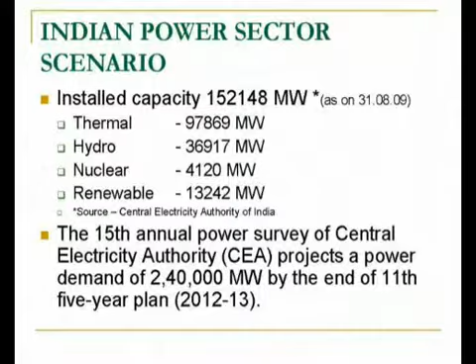On this plate you can see the breakup of that capacity, how this energy is coming, like thermal, hydro, nuclear and renewable. These are the four major sources of power in our country. You can see from this plate that thermal energy constitutes a major chunk of the total installed capacity, followed by hydro, renewable and then nuclear. Nuclear is still in a nascent stage. The projection of power requirement in our country is around 2,40,000 megawatt. So there is a huge difference between the availability and the requirement.

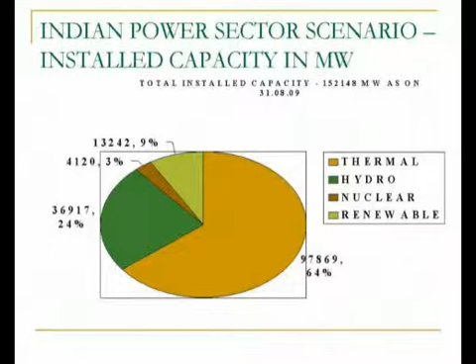This pie chart shows the visual description of the various power sources like thermal, hydro, nuclear, renewable. From this pie chart it will be more clear that thermal is a major portion contributing to the total installed capacity. The world over, the same trend can be seen, because the major source of energy is coal, that is thermal power, followed by hydro and nuclear.

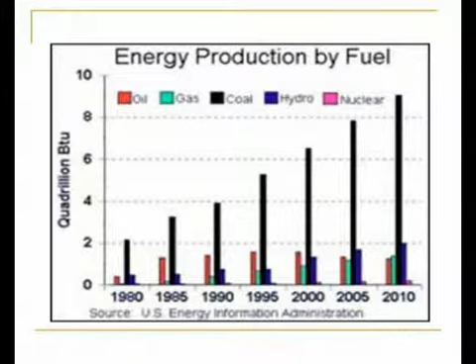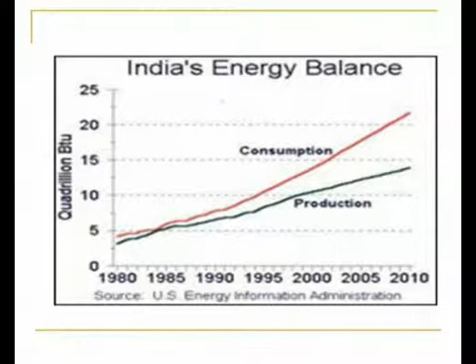This chart shows the graphical representation of the consumption and production of power in India. As you can see, the gap between consumption and production is increasing day by day. Now we will see what are the sources of energy. There are two sources of energy, renewable and non-renewable. As the name suggests, non-renewable sources of energy are exhaustible in nature. Once they are used, they cannot be regenerated.

The most common examples of non-renewable energy sources are petroleum, natural gas, coal, and nuclear. Of these, petroleum and coal are the major sources as far as conventional non-renewable energy sources are concerned. There are certain unconventional non-renewable energy sources also, that is oil shale and natural gas hydrates. But mostly petroleum, natural gas and coal are used the world over.

Now we will see renewable energy sources. As the name suggests, these can be regenerated, renewed, and they are virtually inexhaustible. The types of renewable energy sources are solar, which again constitutes solar photovoltaic and solar thermal power; then wind energy, hydropower energy, biomass energy, ocean energy, geothermal energy, and waste to energy, meaning the waste generated can be used to generate energy.

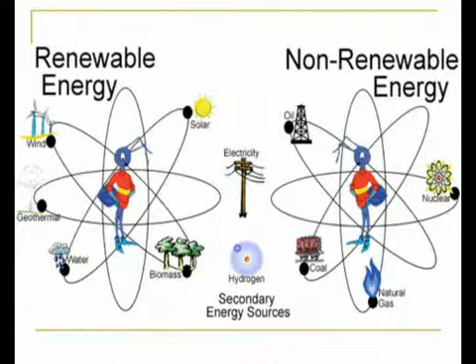This plate shows various sources of renewable energy and non-renewable energy. As you can see, there are two distinct entities, and our renewable energy is having wind, solar, geothermal, water, biomass.

Now, why do we need alternative energy? As I was discussing, the demand for energy is increasing day by day, and our sources are limited. As we consume petroleum, a day will come when we will be exhausting all the sources. So it is very necessary to search for alternatives right from this stage, because fossil fuel reserves are very limited. Population is also increasing. India's population is increasing, and with the population increase, requirement of energy is also increasing. So we have to meet that additional energy demand also. For that, we need to search for viable alternative solutions for energy requirement.

India imports around 110 million tons crude annually. So a major chunk is being spent as foreign exchange towards meeting energy requirements. Moreover, 52% of households, so many villages, are unelectrified. So we have to search for alternatives so that the maximum number of villages can be electrified in a viable manner.

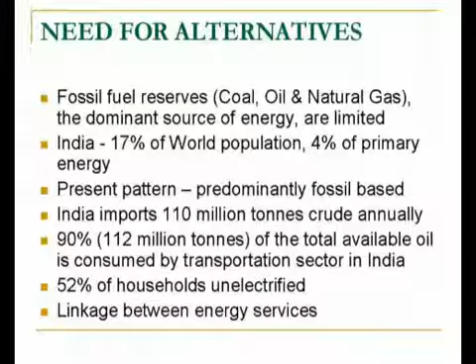We shall now come to the characteristics of renewable energy sources. The most important characteristic of renewable energy sources is that they are virtually inexhaustible. There is a continuous supply which we can realize. It has got a large inexhaustible source. For example, solar energy is intercepted by Earth at the rate of 1.8 × 10^11 megawatt. Another benefit is it is a clean source of energy, that it is very environmentally friendly.

Then large collection areas, but at the same time, these renewable energies also have high capital costs, and the major disadvantage is that availability varies with time. For example, wind power. Wind may not be available at all times, so it is highly cyclical in nature. Then there is a need for additional storage because, for example, if we are generating power by wind, then we need to store that power also, or evacuate that power and transmit it over long distances to load centers. So these are the characteristics of renewable energy sources.

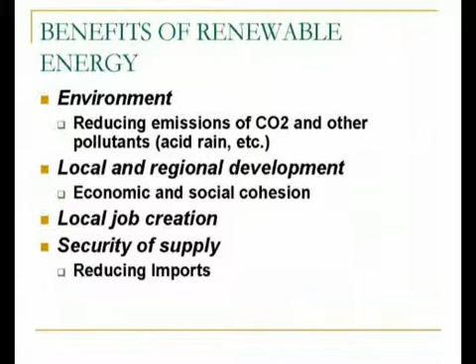Now, what are the benefits of renewable energy sources? The major benefit is that they are environmentally friendly. By using renewable energy sources, we will be reducing emissions of carbon dioxide and other pollutants. Then it leads to local and regional development because in rural areas particularly, it is not economically viable to supply grid electricity. So for that purpose, we need to have renewable energy there. It will also lead to local and regional development and economic and social development of that area. It also helps in creating jobs locally. Then a major advantage is that it leads to security of energy for a nation.

Then cogeneration or trigeneration. What do we mean by cogeneration? Cogeneration means that we are using an industrial process to raise steam which can be used for process industry as well as to generate power. And the fourth is demand side management. That is, by managing the loads, we are using less energy and that way we are helping in generation.

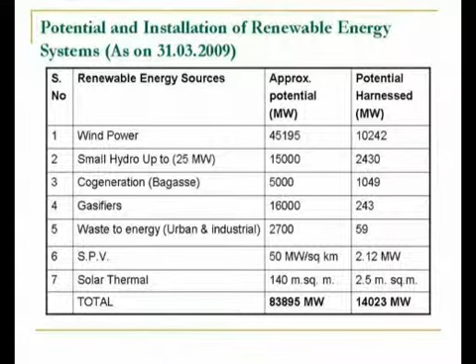Then these are the various sources. The total potential from renewable energy sources in India is pegged at around 83,000 megawatt, of which we have commissioned only 14,000 megawatt as of now. It means there is still a huge potential to realize in these renewable energy systems. By realizing this potential, we can meet almost 25% of our total installed capacity.

Now we will discuss various sources of renewable energy one by one. First we will start with wind energy because that is the area where maximum potential exists. India has done very good work in the field of wind energy and it ranks 5th in the world after Germany, USA, Denmark and UK. The wind energy potential in India has been estimated at 45,000 megawatt, of which 10,000 megawatt has been installed.

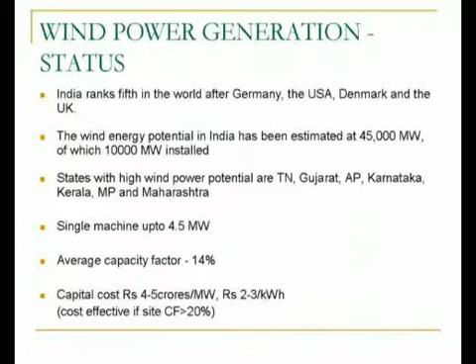Certain states in India have very high wind power potential, like Tamil Nadu, Gujarat, Andhra Pradesh, Karnataka. Nowadays, rapid strides have been made in the technology of wind turbines also, and a single machine of up to 4.5 megawatt capacity is now available. And the average capacity factor of these wind turbines is around 14%.

So, what is wind energy? Its basic principle of operation is very simple. The kinetic energy of wind is converted into mechanical energy, which in turn is used to generate power. Wind turbines are being used since times immemorial. Even in olden days, prehistorically, these wind turbines were used to raise underground water. So this is not a new concept. This is a very old concept.

Only thing is that certain technological changes have made it more economically viable, and it can be used on a large scale also. Nowadays wind turbines are mounted on a tower to capture the most energy, because as the altitude increases, the wind speed also increases. So it would be advisable to put it on a certain height. Say 30 meters is the usual height at which commercial wind towers are installed.

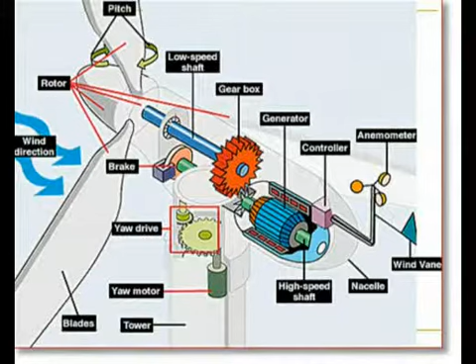This chart is a cross-sectional view of a wind turbine showing various parts. You can see from this chart that the major component of a wind turbine is the rotor. The rotor has got 2 or 3 blades. Then the shaft of the rotor is connected to a gearbox. That gearbox is in turn connected to the generator, so when the blade turns, it moves the generator also, and it generates power. Other things like controller and yaw drive, etc. are also included to control the speed of the wind turbine.

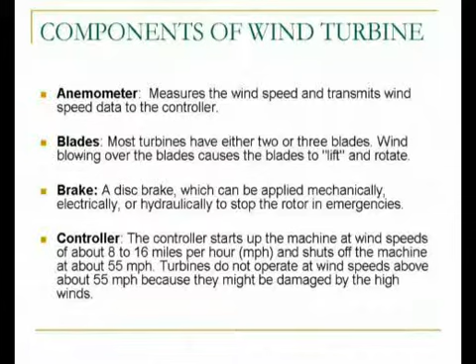So we were talking about the components of the wind turbine, and there are various components like the anemometer. It basically measures the wind speed and transmits wind speed data to the controller. Then blades. Most turbines have either 2 or 3 blades. Wind blowing over the blades causes the blades to lift and rotate. Brake: a disc brake which can be applied mechanically, electrically, or hydraulically to stop the rotor in emergencies. Then there is the controller. This controller starts up the machine at wind speeds of about 8 to 16 miles per hour and shuts off the machine at high speeds to prevent damage to the rotor.

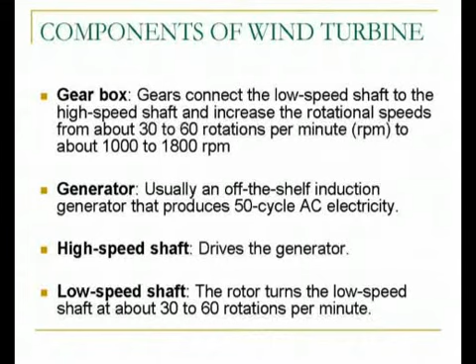Gearbox. Basically, when the wind blows, it drives the rotor, which moves at a very slow speed. That speed is converted to a high speed through this gearbox. Then the generator is usually an induction generator that produces 50 hertz frequency AC electricity, and there is a high speed shaft which drives the generator. These are the various components of a wind turbine. The towers are made from tubular steel, concrete or steel lattice. It can be of any material. Because wind speed increases with height, taller towers enable turbines to capture more energy and generate more electricity.

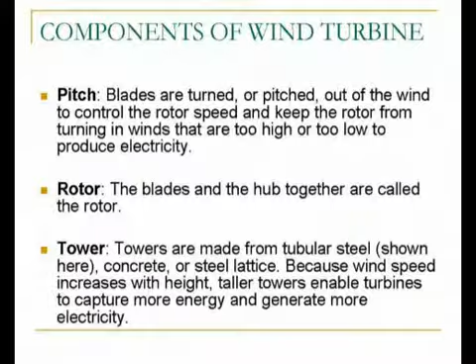What are the advantages of wind energy? It is a clean fuel source. No pollution is involved because you are only utilizing the natural wind which is available. It is inexhaustible; there is no dearth of wind.

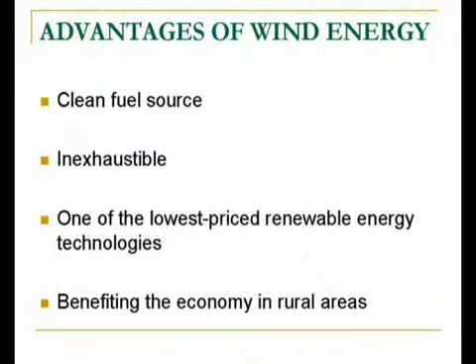Then it is one of the lowest price renewable energy technologies. Later on we'll compare the capital and running cost of all the sources of energy. In that chapter we will see in detail what the pricing is. But this wind energy is one of the lowest price renewable energy, and that is the reason it has been developed in India at a considerable rate, and it benefits the economy in rural areas.

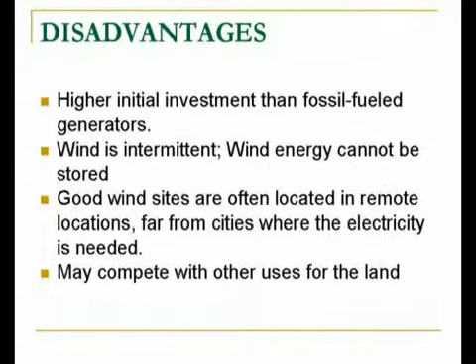Now, what are the disadvantages? Let us see the disadvantages also. As compared to fossil fuel generators and conventional power plants, it has got a higher initial investment. A major disadvantage is that wind is intermittent and it is very unpredictable. So, wind energy cannot be stored.

It cannot be stored. And good wind sites are often located in remote locations far from cities where the electricity is needed. So a lot of cost is involved in evacuating that power generated from the wind generator and transmitting it over long distances to the load centers.

Another disadvantage is that it may compete with other uses for the land, because the requirement of land is huge for establishing wind power plants. So it may compete with other uses for land, for example farmlands or other uses also.

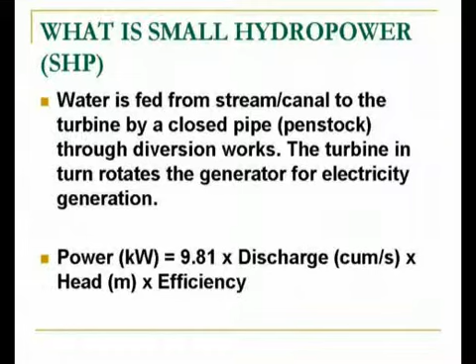Usually, the water is fed from a stream or canal to the turbine by a closed pipe. This closed pipe, which we saw in the photograph, is called penstock. This is the technical name for it, penstock. So, the source of water is usually an existing river stream, from where the water is brought in this penstock. This water then rotates the turbine at high velocity for electricity generation.

There is a formula for how much power can be generated from a small hydropower plant. Power in kilowatts generated is equal to 9.81 into discharge, that is the flow of water, how much water is flowing, into head, from what height this water is coming, into the efficiency of the turbine. This formula gives the power generated.

Advantages of small hydropower. This small hydropower has got non-consumptive use of water. It means that actually we are not utilizing this water, we are just using the kinetic energy of this water to generate power. It also does not require a very large capital investment, and it has got a very short gestation period ranging from 6 to 24 months. So in a matter of around 2 years it can be commissioned.

It has low operation cost also, and not much technical knowledge is required. Unmanned power stations are also possible in this case. It can be connected with the electricity grid, and it can act as a catalyst in promoting socio-economic changes in remote areas. It is definitely more eco-friendly as compared to conventional hydropower, because a lot of environmental concerns are being raised for conventional hydropower. So these small hydropowers are a very good substitute to conventional hydropower.

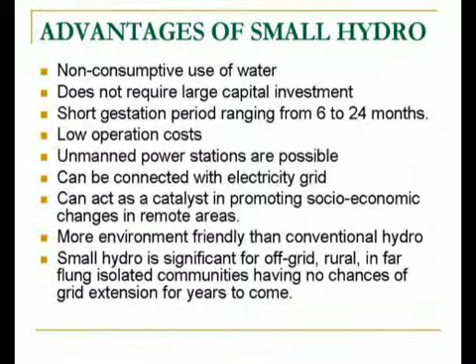And small hydropower is significant for off-grid, rural, and particularly mountain and hill areas, where a lot of scope exists for small hydropower. Now we'll see how these small hydropower plants are classified. Classification based on capacity. Various countries adopt various systems for classifying these small hydropower plants, but in India we have classified it into three parts. One class is micro, when the station capacity is up to 100 kilowatt. SHP whose capacity is up to 100 kilowatt is known as micro small hydropower.

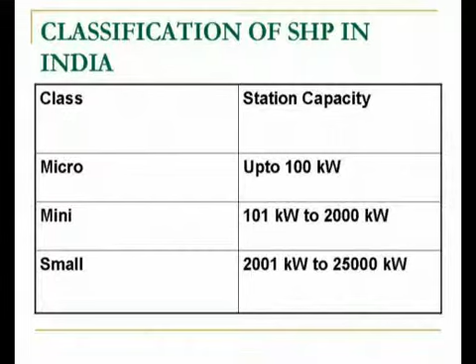Then comes mini. This capacity ranges from 101 kilowatt to 2000 kilowatt, that is 2 megawatt. 1 megawatt is equal to 1000 kilowatt. And next comes small hydropower. Its capacity ranges from 2 megawatt to 25 megawatt. Above 25 megawatt, all the power projects in the sector are classified under hydropower.

Types of schemes, how these small hydropower projects are constructed. There are three systems actually in this. One is run-of-river based. In run-of-river, the flow of water is utilized to generate the power. So no storage is involved, and the output is of course subject to the instantaneous flow of the river. So if the flow is less, then the power generated will be less. And reliability of discharge is very much necessary to be established, because if there is no reliability, then the plant factor will go down.

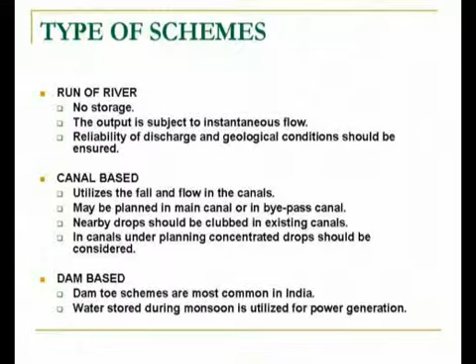Second classification is canal based. It utilizes the fall and flow in the canals. When we are constructing canals for irrigation purpose, it follows the natural topography of the area, and when there is a natural gradient in the canals, this gradient is utilized to generate power. It can be planned also while constructing the main canal or in a bypass canal. So the drops in the natural gradient of the canal are used for generating power.

Then the third scheme comprises dam-based small hydropower, in which dam toe schemes are most common in India. Here water stored during monsoon is utilized for power generation.

Cost aspects of small hydropower. The parameters affecting costs are: the physical sizes of civil works and electromechanical equipment, the construction aspects, and operating costs. These are the three components of project cost. The unit cost of hydro schemes is inversely proportional to the head. That is, higher the head, lesser the cost. And per kilowatt cost may range from 40,000 rupees to 90,000 rupees depending upon the layout, and it is very location specific.

If we compare small hydro with other renewables, it is the highest density renewable energy source against widely spread and thinly distributed solar energy, biomass, wind resource, etc. And its cost of generation is also cheapest among renewables. The efficiency of small hydro plants is highest among renewables as compared to wind energy or solar energy. The efficiencies are comparatively higher.

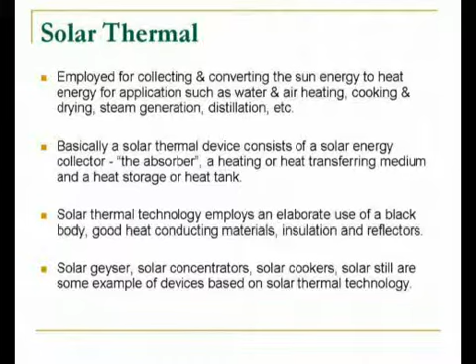Solar thermal technology employs an elaborate use of a black body, because a black body absorbs heat and is a good heat conducting material, along with insulation and reflectors. Solar geyser, solar concentrator, solar cookers, and solar still are some of the examples of devices based on this solar thermal technology.

Solar photovoltaic. Solar photovoltaic technology is employed for directly converting solar energy to electrical energy by using a solar silicon cell. It is commonly known as SPV, solar photovoltaic. Solar photovoltaic has found wide application in rural areas for various important activities besides rural home lighting.

Remote villages deprived of grid power can be easily powered using solar photovoltaic technology, and it can thus revolutionize the concept of making power available in remote and far-flung rural areas. The economics of rural electrification can be attractive considering the high cost of power transmission and erratic power supply in rural areas.

How is electricity generated through solar energy? Now we will see that solar photovoltaic can be used to generate electricity from the sun. We are using a silicon solar cell, which is made of silicon. It plays an important role in the generation of electricity. A solar cell is nothing but a PN junction, a positive and negative PN junction.

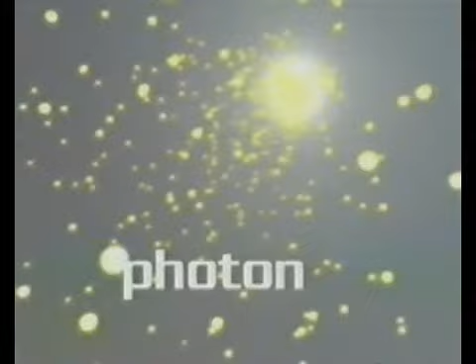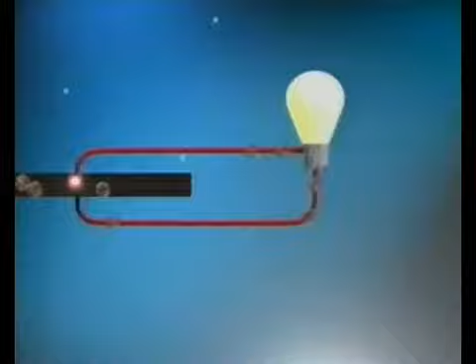Sunlight is made up of tiny packets of energy called photons. Every minute, enough of this energy reaches the Earth to meet the world's energy demand for a whole year. Photovoltaic panels consist of many solar cells. These are made of materials like silicon, one of the most common elements on Earth. The individual cell is designed with a positive and a negative layer to create an electric field, just like in a battery. As photons are absorbed in the cell, their energy causes electrons to become free. The electrons move toward the bottom of the cell and exit through the connecting wire. This flow of electrons is what we call electricity. By combining solar cells and photovoltaic panels, we can produce just the right amount of electricity to perform a specific job, no matter how large or small.

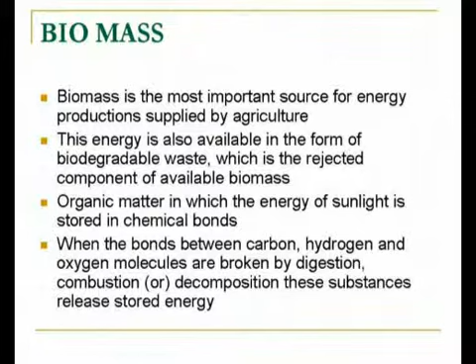Now we will come to biomass. Biomass power is the most relevant form of energy as far as rural areas are concerned, and it is the most important source of energy for production supplied by agriculture. This energy is also available in the form of biodegradable waste, which is the rejected component of available biomass. Organic matter in which the energy of sunlight is stored in chemical bonds. When the bonds between carbon, hydrogen and oxygen molecules are broken by digestion, combustion or decomposition, these substances release stored energy.

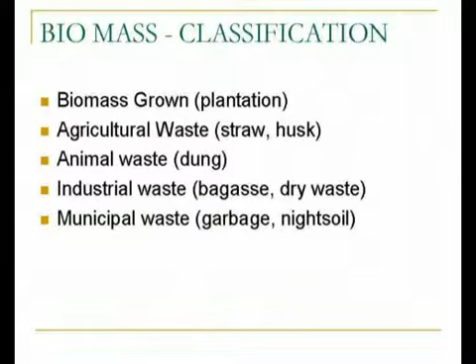There are again various classifications of biomass. One is biomass grown, that is plantation. The other is agricultural waste, waste from agriculture like straw, husks. Then there is animal waste, for example, cow dung. Then industrial waste like bagasse, dry waste. And the last is municipal waste, that is garbage and night soil.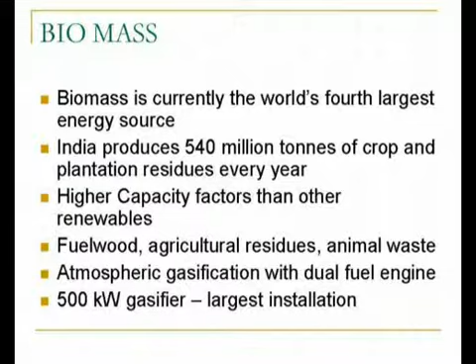Biomass is currently the world's fourth largest energy source. India produces around 540 million tons of crop and plantation residues every year. Higher capacity factor: these biomass plants have higher capacity factors than other renewables. And atmospheric gasification with dual fuel engine occurs. A 500 kilowatt gasifier is the largest installation in this field as on date.

Bagasse based cogeneration is another aspect of biomass power. What is bagasse? Bagasse is nothing but the residue left when the juice of sugarcane is extracted. So this byproduct of sugarcane extracted juice, that is bagasse, is used for generating power. First of all, this dried up mass is used in boilers to generate steam, and that steam is used in the process industry like the sugar industry, and the surplus steam is used for raising the power.

So it is a very important concept for a sugar producing country like India, and in a lot of states, the sugar industry has already commissioned these bagasse based cogeneration plants. Thereby they are meeting their own power requirements, and the surplus power is being fed to the central grid.

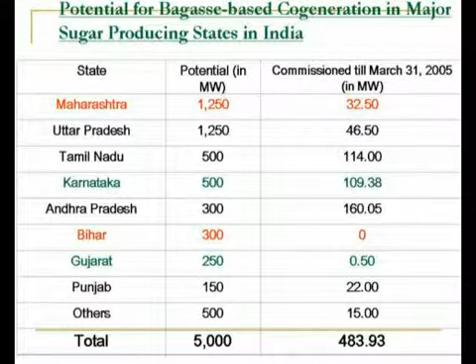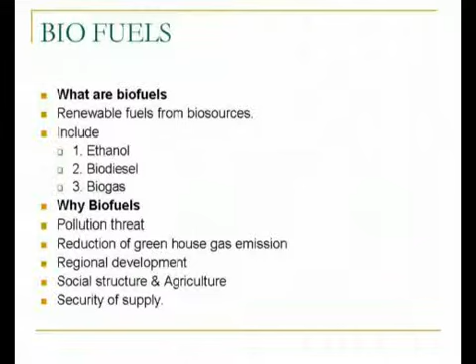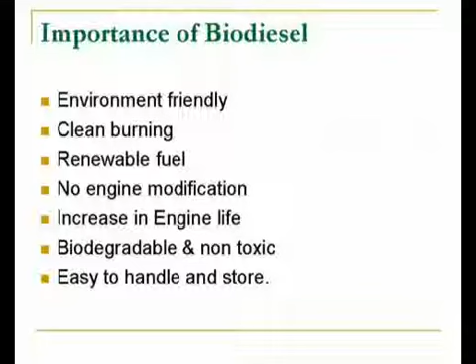Now we will discuss biofuels. What are biofuels? Biofuels are renewable fuels from biosources. They include ethanol, biodiesel and biogas. A lot of talk is being generated on biofuels nowadays, and why should we be using biofuels? Because by using biofuels, there is a reduction of greenhouse gas emission. Then there is security of assured supplies. Biodiesel is very environment friendly, and it is a renewable fuel.

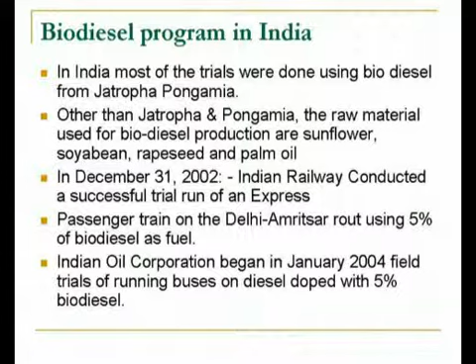No engine modification is required, it is non-toxic, and it is easy to handle and store as compared to other conventional gas. In India, most of the trials were done using biodiesel from Jatropha and Pongamia. Other than Jatropha and Pongamia, the raw materials used for biodiesel production are sunflower, soybean, rapeseed, and palm oil. In 2002, Indian Railways also conducted a successful trial run of an express using this biodiesel, and a passenger train on the Delhi-Amritsar route is using 5% biodiesel as fuel. Indian Oil Corporation has also begun field trials of running buses on diesel doped with 5% biodiesel. All these examples show the increasing use of biodiesel in our country.

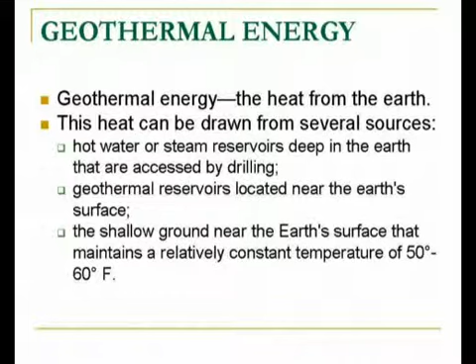Now we will discuss in brief about geothermal energy. Geothermal energy, as the name suggests, is the heat from the earth. Geo means earth, thermal is heat. Heat from the earth. This heat can be drawn from several sources like hot water or steam reservoirs deep in the earth that are accessed by drilling, then geothermal reservoirs located near the earth's surface, and the shallow ground near the earth's surface that maintains a relatively constant temperature of 50 to 60 degrees Fahrenheit.

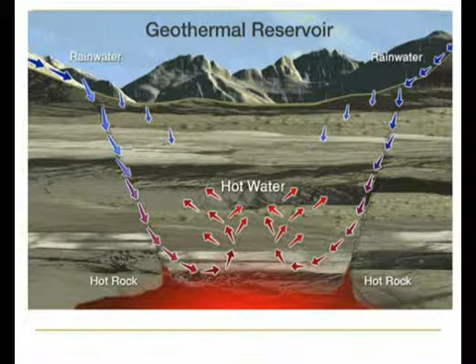This plate shows a typical geothermal reservoir where the rainwater is seeping down below, and the hot rocks which are already there heat the underground water, and that water comes on the surface in the form of geysers.

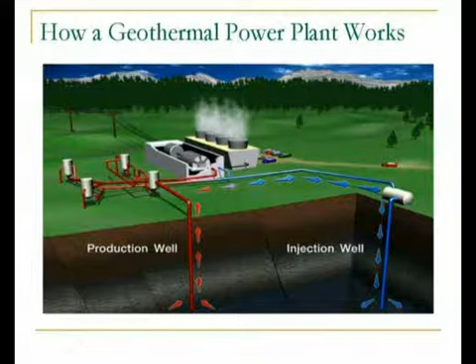This is an artistic view of how a geothermal power plant works. From this figure, you can see that there is a production well and there is an injection well. So wherever these geothermal activities are found and where it is established that hot water is available, that water is drawn by drilling a well. That water is used for raising steam, and the steam in turn is used for generating power, and that same water is again injected back so that there is non-consumptive use of water.

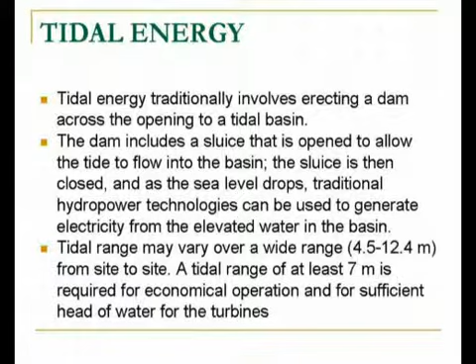Now we'll discuss tidal energy. Tidal energy traditionally involves erecting a dam across the opening to a tidal basin. This dam includes a sluice that is opened to allow the tide to flow into the basin. The sluice is then closed, and as the sea level drops, traditional hydropower technologies can be used to generate electricity from the elevated water in the basin. Tidal range may vary over a wide range, that is 4.5 to 12.4 meters, and it depends on site to site. A tidal range of at least 7 meters is required for economical operation and for sufficient head of water for the turbines.

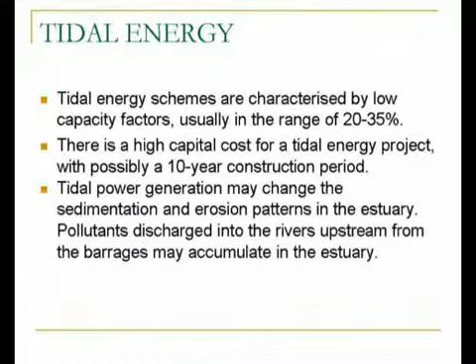Tidal energy schemes are characterized by low capacity factors, usually in the range of 20 to 35%, and there is a high capital cost for a tidal energy project with possibly a 10-year construction period. Tidal power generation may change the sedimentation and erosion patterns in the estuary also, and this is an added disadvantage. And pollutants discharged from the rivers upstream from the barrages may accumulate in the estuary. So these things have to be taken into consideration while designing a tidal power project.

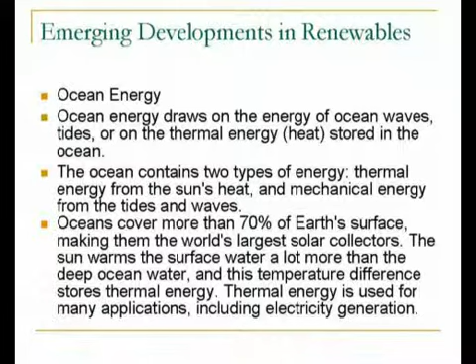Now, other emerging developments in renewable technologies; we will briefly glance through these emerging developments. This is ocean energy. Ocean energy draws on the energy of ocean waves, tides, or on the thermal energy stored in the ocean. The ocean contains two types of energy, that is thermal energy from the sun's heat and mechanical energy from the tides and waves. Oceans cover more than 70% of Earth's surface, making them the world's largest solar collectors. The sun warms the surface of water a lot more than the deep ocean water, and this temperature difference stores thermal energy. Thermal energy is used for many applications including electricity generation.

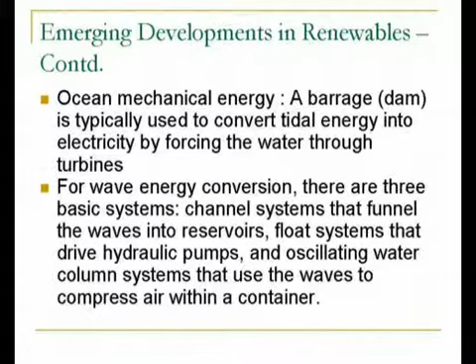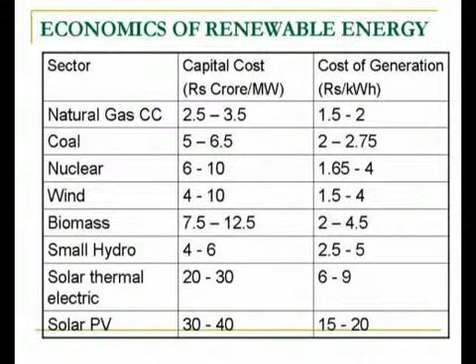It can be seen that solar thermal power plants are still very costly. As far as capital costs are concerned, it is still not viable. The value ranges typically from 20 to 30 crore rupees per megawatt, and solar photovoltaic is still costly. It ranges from rupees 30 to 40 crores per megawatt, whereas small hydro is very much comparable with contemporary thermal coal power plants, and it is in the range of rupees 4 to 6 crore per megawatt. Wind is also comparable to this small hydro.

Now, as far as cost of generation is concerned, the cost of generation of solar photovoltaic energy is highest. It runs in the range of 15 to 20 per kilowatt hour, that's per unit. Whereas wind and small hydro are quite cheap.

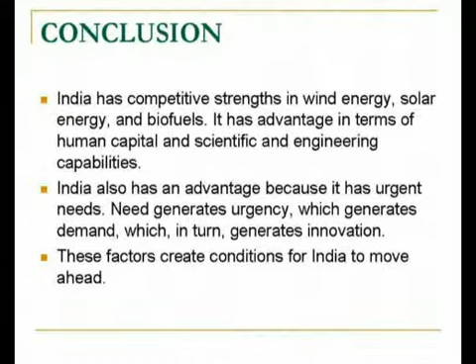Now we will conclude this session. You see that India has competitive strengths in wind energy, solar energy, and biofuels. These are the three areas which we should concentrate upon to maximize the potential from these three sources of renewable energy, that is wind energy, solar energy, and biofuels. India also has an advantage because it has urgent needs, and to minimize the gap between requirement and availability of power, we need to rapidly search for alternative, viable energy sources. So these factors create conditions for India to move ahead.

The government cannot do everything, however, individual or cooperative efforts can do a lot. Many rural communities consume little electricity, and extending electricity grids to meet their energy needs will prove more costly and take longer than harnessing new and alternative sources of energy already available in these communities, like wind, solar, and biomass. The attraction of these sources lies primarily in their abundance and ready access.

The renewable energy technologies for exploiting these sources include biogas plants. So all these areas are very much relevant and may prove very useful for providing energy security for our rural areas. For example, biogas plants, solar lanterns, solar home lighting systems, improved cooking stoves, improved lanterns, particularly solar water pumping systems for irrigation, solar water heating systems, and water mills. These technologies can be readily used in rural areas for maximum utilization.

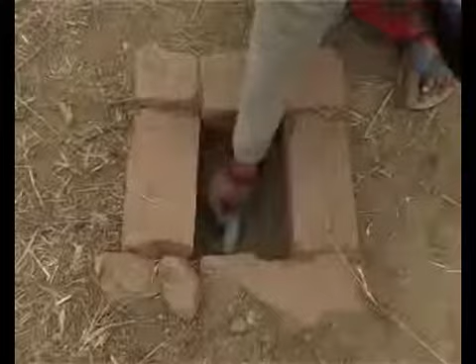In a situation where the people's daily firewood requirement outstrips the annual incremental biomass growth in the forest areas, the only logical solution seems to be the provision of an alternate source of energy. Over the past 15 years, Grassroots has been able to demonstrate the viability of an alternative by construction of household-level biogas units as a renewable energy option. These provide clean, smokeless cooking gas and thereby have a positive impact on family health, besides reducing the biotic pressure on the forest resources.

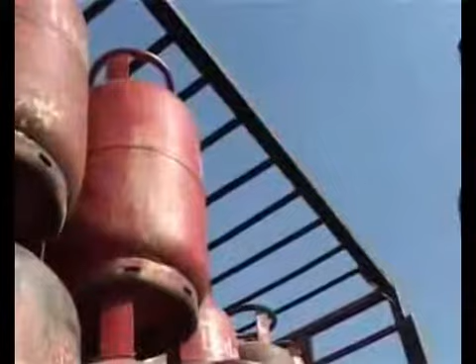Depletion of forest cover also has an adverse effect on the recharge of the subsurface groundwater, which in turn leads to drying up of natural springs in the region. This means that women and children need to spend even more time and energy fetching water from distant sources. Fossil-based fuels like LPG, kerosene and coal are non-renewable and expensive. A large amount is spent by the government annually in subsidy and transportation of such fuels.

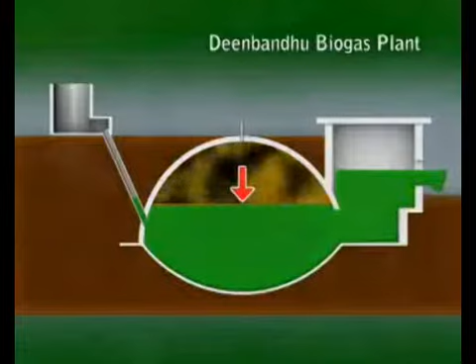In the absence of oxygen, certain bacteria found in cow dung break down this mixture to produce methane, which rises to the top of the dome and is piped to the kitchen to be used as fuel. This cycle is continuous and a fresh mixture is introduced every day. When gas is formed in the dome, it increases the pressure inside. The increased pressure pushes down the mixture, causing the level of spent mixture to rise in the outlet tank, from where it moves out in the form of slurry. This slurry is mixed with dried leaves, leftover fodder and stalks to produce excellent organic manure.

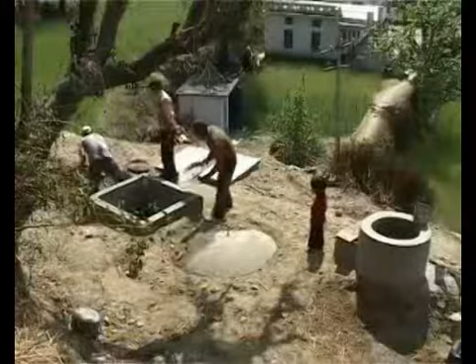In colder climates, like the lower reaches of the Himalaya, the Deenbandhu fixed dome model is ideal because the digestion chamber is underground, providing good insulation against the cold. We use a design optimized for a longer 55-day cycle so that the mixture gets more time for digestion. Care is also taken to choose sites that receive at least 2 to 3 hours of sunlight in winter.

We have found that while the production of gas does reduce by about 25% during 3 months in winter, the plants function very well, and a 1 cubic meter plant provides 3 to 4 hours of clean cooking fuel every day.

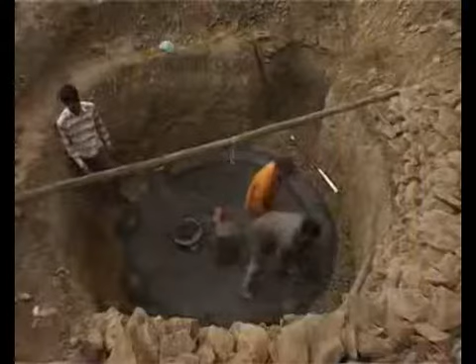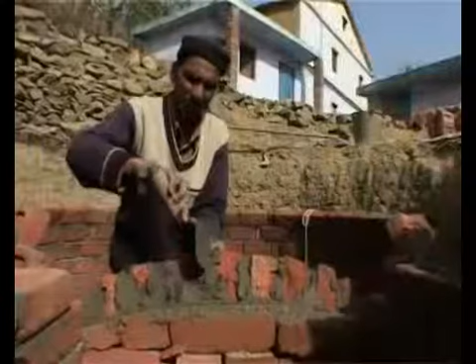In order to expand the use of such appropriate technology applications in the Himalaya, we trained young men from local communities to construct and maintain these plants. This has grown to become a dedicated body called the Kumaon Artisans Guild, with over 50 barefoot engineers. The guild has so far constructed 1,400 household-level biogas plants in 8 districts of Uttarakhand and Himachal Pradesh, enabling these families to reduce their dependence on firewood or other fossil fuels for cooking.

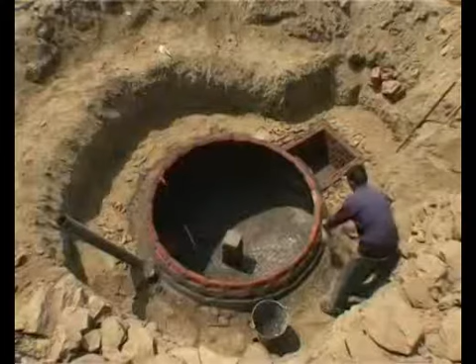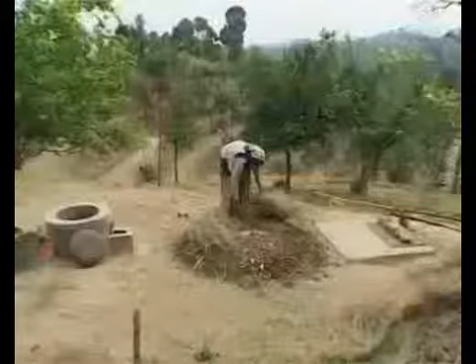We have found that the critical factors for success with biogas are ensuring quality during construction and training user groups in the correct use and maintenance of their plants. Ignoring these critical issues often leads to the failure of biogas plants, perpetuating the myth that biogas technology is inappropriate in the Himalaya and elsewhere in the country.

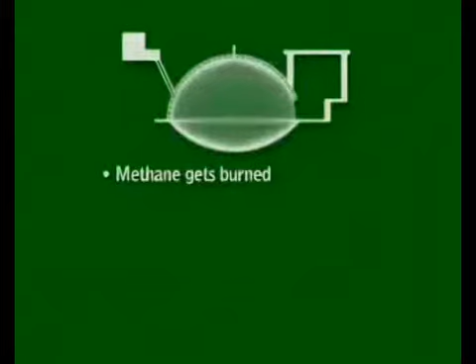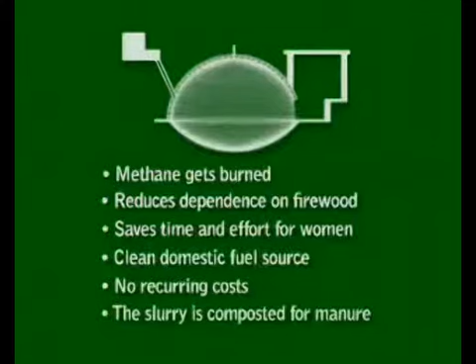The main advantages of using biogas are: methane, one of the greenhouse gases responsible for global warming, gets burned. Households using biogas need very little firewood, reducing the pressure on our fragile forests. It reduces the drudgery of collecting and carrying firewood daily for women, freeing up time for other activities. It is smokeless and thus has a positive impact on family health. There are no recurring costs. The cow dung used is not lost, as the composted slurry makes a much richer organic manure.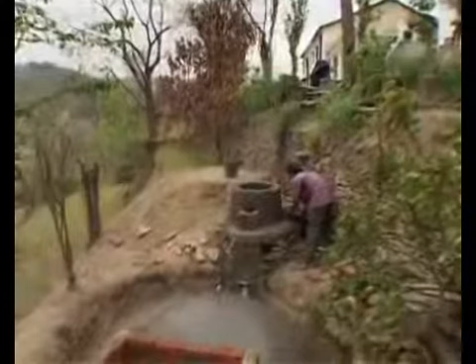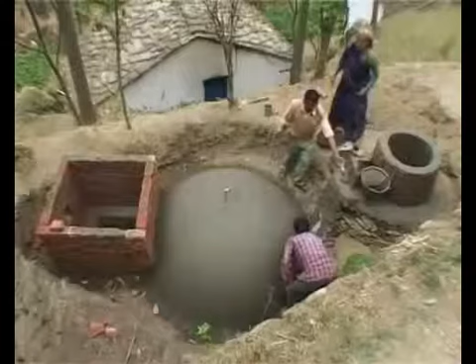The challenge is to scale up the adoption of this technology to help protect the existing forest cover and allow revegetation efforts to succeed. A 1 cubic meter plant currently costs 15,000 rupees in hilly areas. With per capita income of mountain communities being low, the initial cost becomes a major obstacle in the spread of this technology. Households usually contribute about 70% of the cost in cash plus labor inputs. Grassroots has been providing the rest through a small government subsidy and donations from civil society.

At a time when the whole world is waking up to the realities of climate change due to burning fossil fuels, and there is talk of carbon credits for the reduction of greenhouse gases, we must look at biogas with renewed interest if we are serious about providing clean domestic energy as part of our Millennium Development Goals.